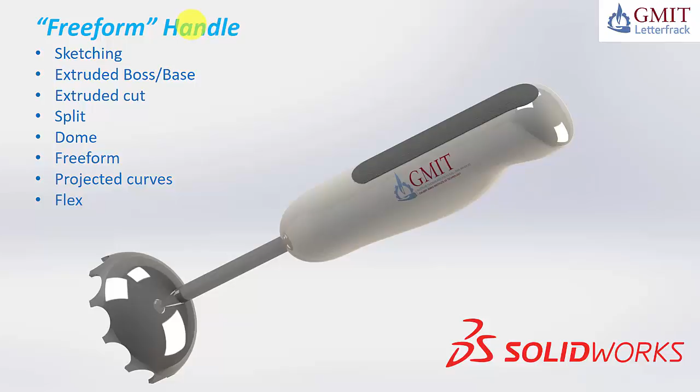In this tutorial I'm going to run you through the Freeform feature primarily. The blender handle itself isn't overly realistic, it's just a request I had from a teacher to generate the exact shape at the top of the blender handle. This is a pretty common type of handheld blender, and a lot of them can be drawn with a revolve feature, which is pretty simple, but some of them don't have rotational symmetry, so they can't be drawn that way. In this case we should use the Freeform feature to get this little molded indentation.

In this tutorial we will also be working through some basic stuff like sketching, extruded boss bases, and extruded cuts. We'll also split a solid, use a dome feature to get the curvature on the top, use a freeform feature to mold the main shape of the handle, and use a projected curve to put the black grip on the back. We'll also apply a flex feature just to show you what it does, but it hasn't actually been applied in this image. So let's begin.

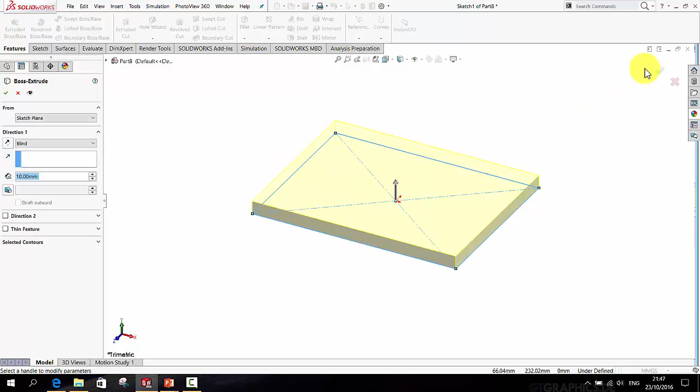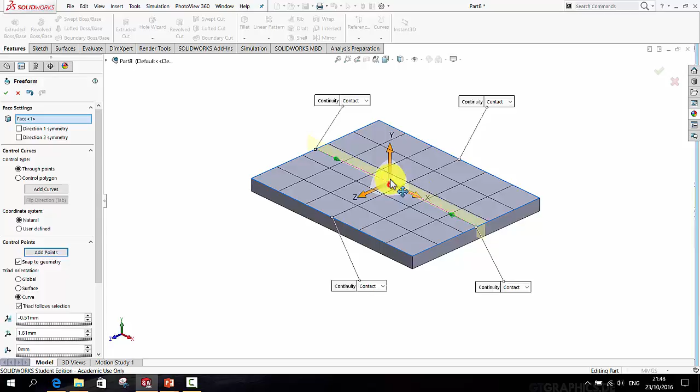Now moving over to SolidWorks, I'm going to begin with a quick demonstration to explain what the Freeform feature does. By creating a simple solid, I can go to Insert, Features, Freeform, select any face I wish, add a curve or curves to the surface, add points to that curve, and then simply drag those points up or down to deform or mold the surface into the shape I want.

So that's just a quick demonstration of what the feature does. I will delete that and begin again.

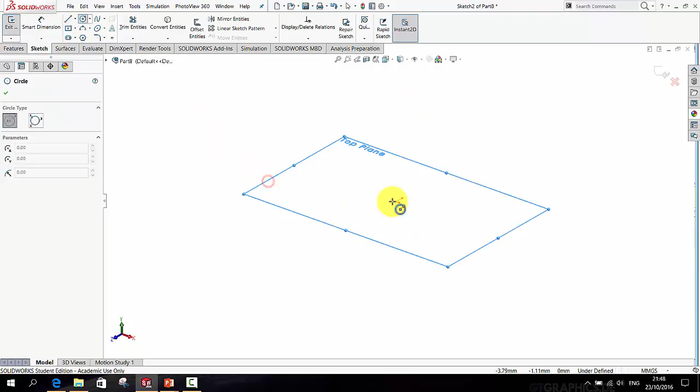This time I'm going to sketch a circle on the top plane and extrude that into a cylinder. I'm not going to give precise dimensions because it's more the concept I'm interested in this time rather than the actual artifact. So I'll generate a cylinder with approximately those proportions.

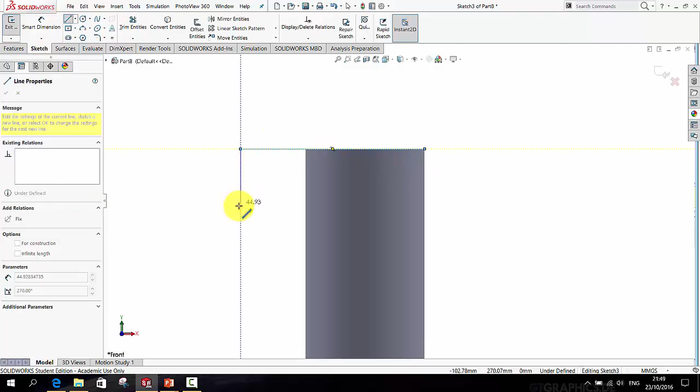Now on this plane I'm going to draw a sketch to cut a 25-degree taper from the top of the handle. Dimension those two lines to be 25 degrees and apply an extruded cut. Let's set that to be mid-plane, and now I have a nice bevel at the top of the handle.

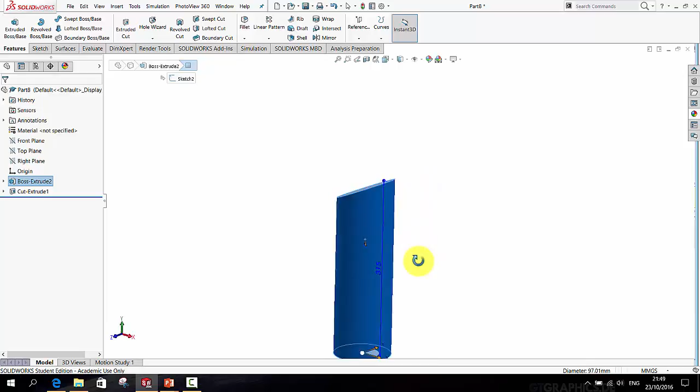It will not be possible for me to freeform or mold that blue surface in the same way as I did a moment ago, because that surface is infinite. It's got no edges, it just goes round and around. So to do that, I must use the right plane in this case as a tool to split that solid in two.

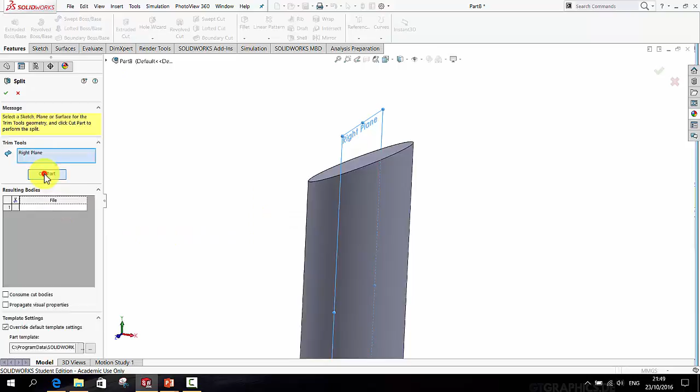So if I go to Insert, Features, Split, and select Cut Part, then confirm the two solids by clicking them and press the green tick, I now have this solid with that face, which certainly isn't infinite. It has a definite edge to the left and to the right.

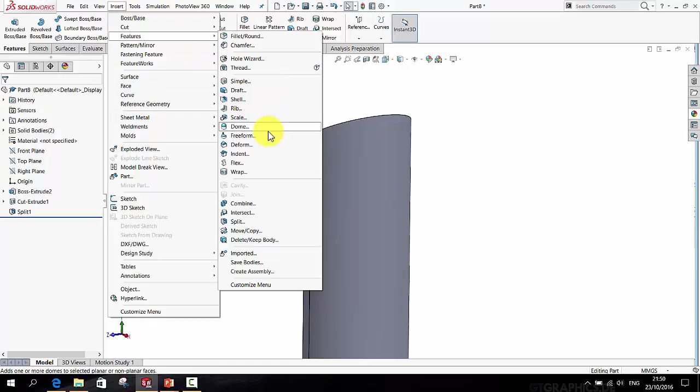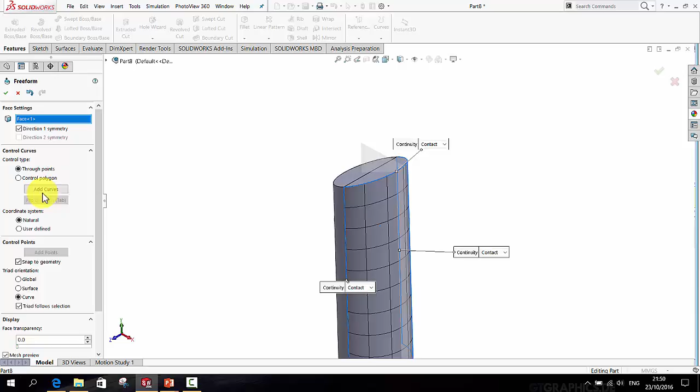So call up the Freeform feature, Insert, Features, Freeform, select the face I wish to deform, and I want to add curves, or one curve in this case, but I want to add it perfectly on the apex or extremity of that curved surface. To do so, I'll activate the Direction 1 Symmetry option, which will mean when I select Add Curves, as I move along it will snap to that point.

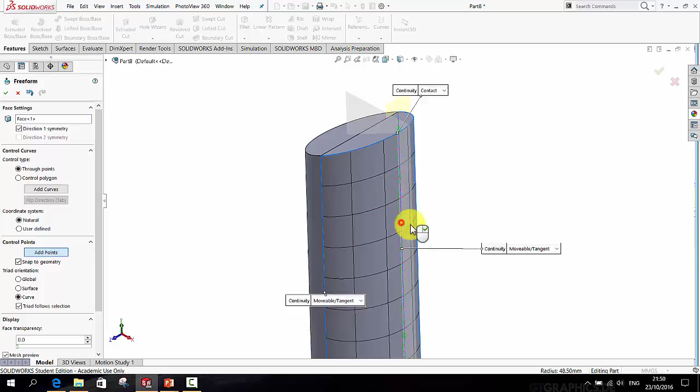So that line is going to be exactly where I want it. Click there. It will of course allow me to add more curves, but I'm happy with the one for now. So I will move over and select Add Points, and I'm just going to add a few points, maybe one there, and one there. When you're happy you've got enough points added, simply tap - sorry, I made a mistake there, so I'll undo that.

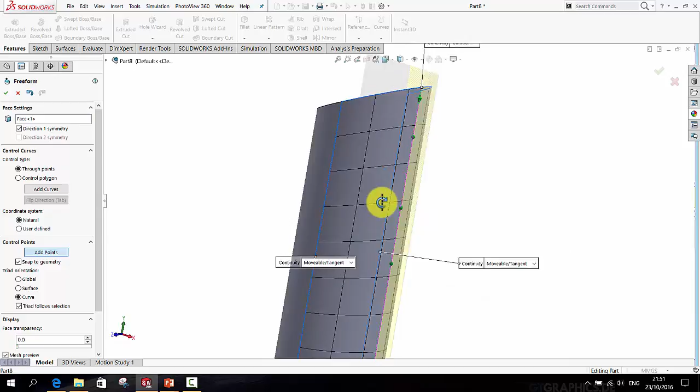Let's add the points more carefully to this curve. Add a point there, and one there. As I said, when you're happy the points are in the right location, tap Escape once, then simply drag the points.

Now it looks as if I'm dragging those randomly, but as I move those, look in the bottom left hand corner of the screen. The XYZ coordinates are given, so I can precisely move those in and out if I wish.

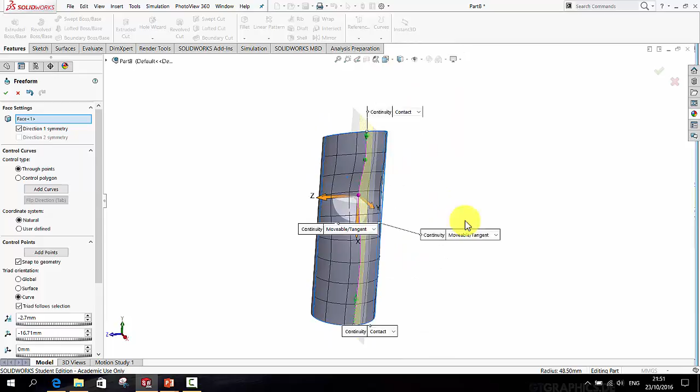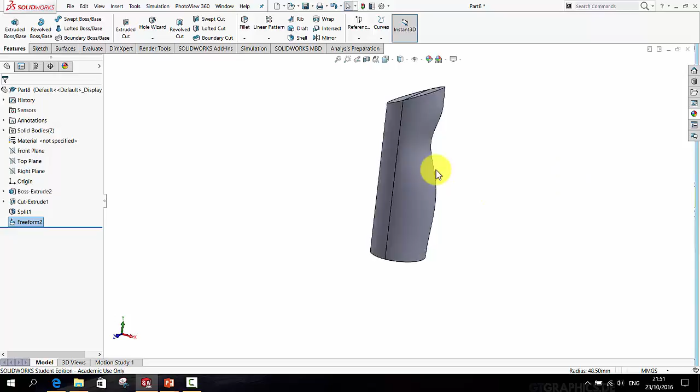These four handles that appear will also allow me to select how this curvature transitions into the adjoining face. So if I wanted, I could change this to tangent, and it would transition tangentially into its neighbour, which is what I want. I also want this one to transition tangentially - it's already picked up that, and I'm happy with that for now. If you wanted, you could have used a sketch picture to drag those points precisely in alignment with the sketch picture, but for now I'm happy with that.

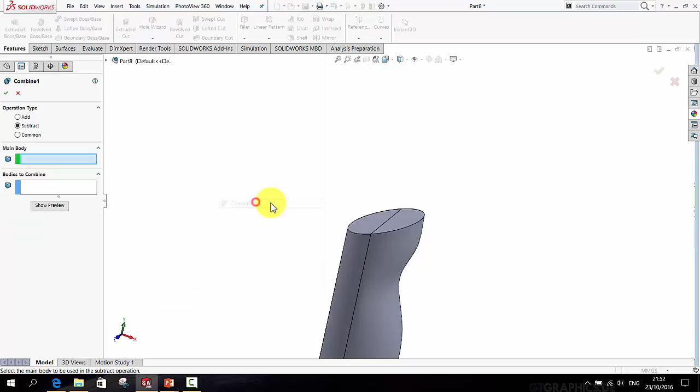I don't want a handle generated in 2 separate pieces, so I now have 2 separate bodies which I will join back together. Go to Insert, Features, Combine, and make sure the operation type is set to Add. Then simply select the 2 solids and press the green tick.

That's now 1 solid, so I will use the dome feature to pop out this top portion of the handle. Go to Insert, Features, Dome.

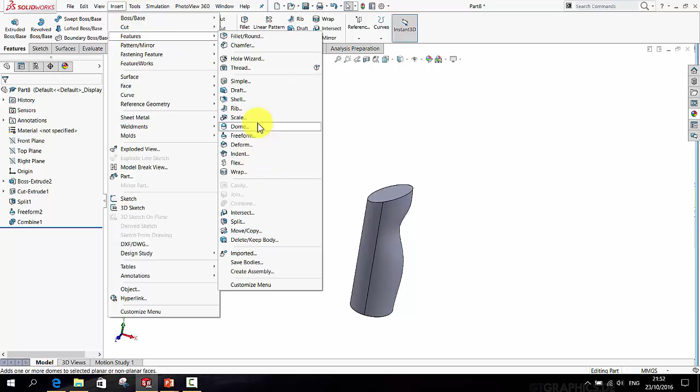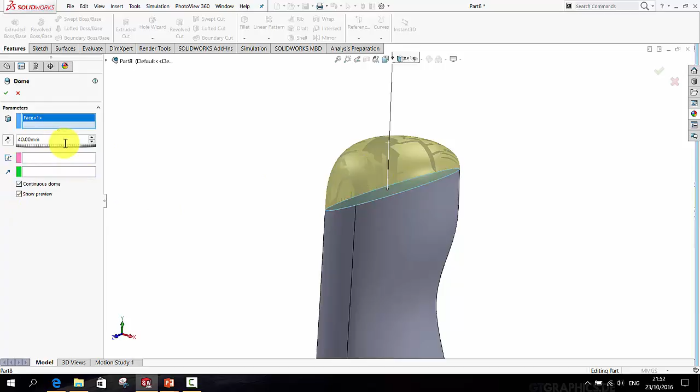Select the top face, and you may have to deselect Continuous Dome and add a bit of height, then select Continuous Dome again. Sometimes that happens - it doesn't give you the proper preview until you toggle that or make a change. In this case I needed to make the change, so 40 looks okay. Press the green tick and we're all set.

I've not used dimensions there, and if I turn off the hidden lines or shaded edges for a moment, it looks pretty good. It would look a lot better if I were working from dimensions, but that would slow me down a lot.

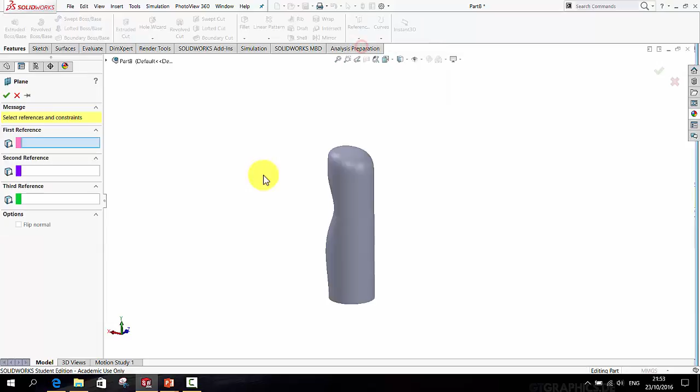So one other thing I will do is create a new plane, a reference geometry plane, make it parallel to the right plane in my case, and position it off the back somewhere, just so it's not touching the solid.

Start a sketch of a slot on that plane, look 90 degrees to it, and position the slot somewhere like that.

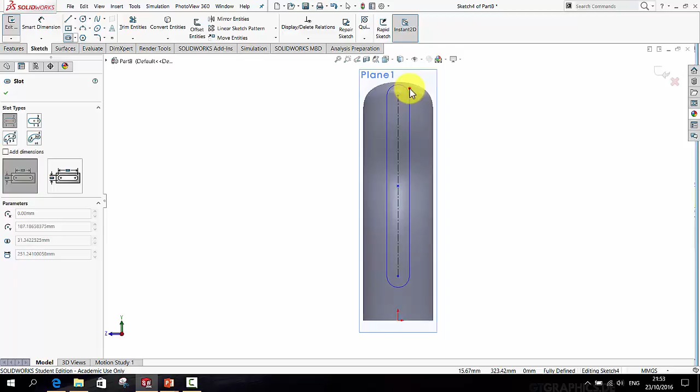As you can see, that sketch is away from the solid itself, but that's what I want. I'll now right click the plane and hide it, and I want to project that sketch onto the curvature. Let's see if we can do that.

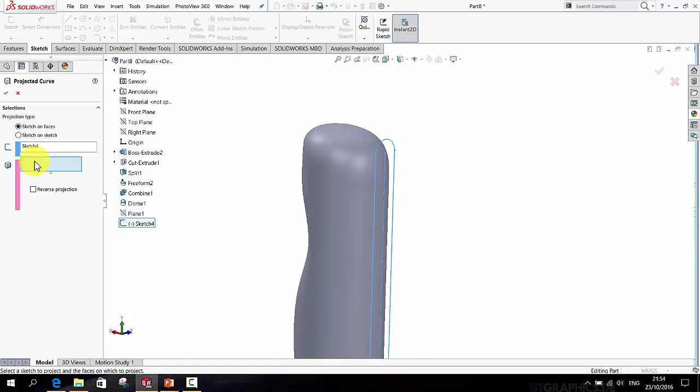Insert, Curve, Projected. It's looking for the sketch first of all - the sketch to project is sketch 4 in my case, and the projection faces are that face and that face. Press the green tick. I now have that sketch projected onto the handle.

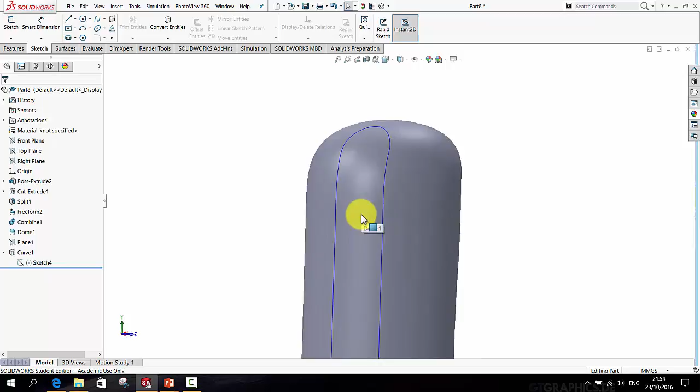I'm going to right click and hide that sketch for a moment - I don't need that anymore. I seem to have missed it, there we go. And if I want to thicken this or expand this out a little, here's what I can do.

If you do not have your Surfaces tab, right click any of the other tabs and make sure it's active. Click the Surfaces tab, then Knit Surface - those surfaces need to be knit together for now. Click the 2 of them and press the green tick to approve.

I now have a new folder called Surface Bodies. If I select the only surface body I have, I can see it's made of a few different faces, but I just want this little slot shape to be the surface.

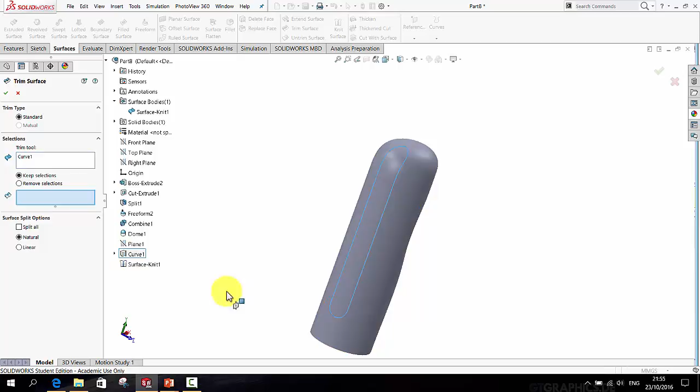Using the Trim Surface tool, select the trim tool as being this curve, then select Keep Selections, and simply select this portion of the surface and press the green tick. Now that surface trim only exists within the boundary I've just set.

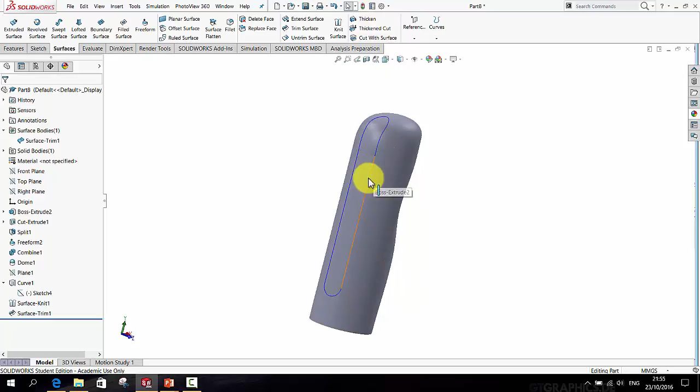What I can do then is either a thicken or a thickened cut feature to either indent that or emboss it out a little. I'll bring it out a little, so click Thicken. Set the value to be a millimeter, and not mid-plane, just out.

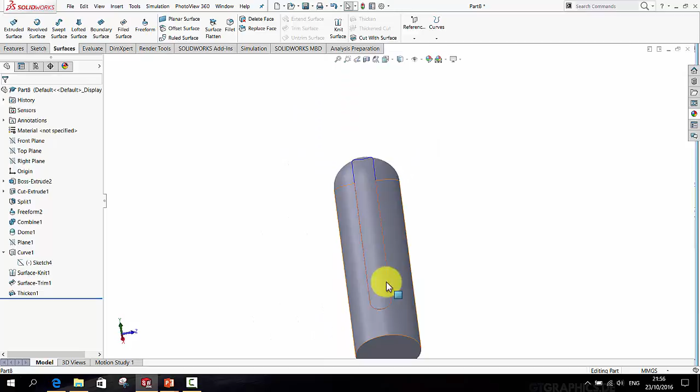If I approve that, that has been thickened. The line still stays there, so I need to right-click that curve and hide it. But if I turn back on the edges, you should see that solid has now made its way out.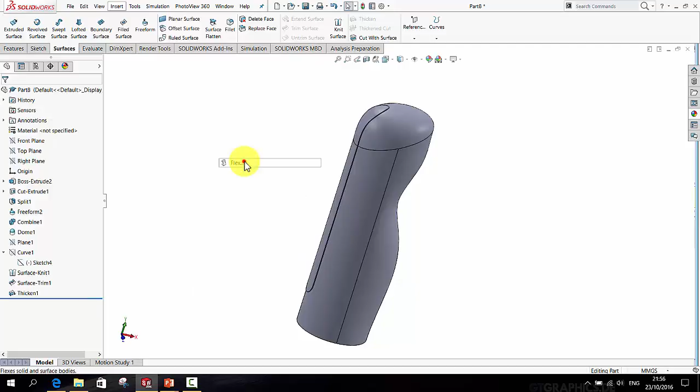The last thing I will do - sometimes these are a little more organic or curved, so what you can do is flex them a little. Go to Insert, Features and Flex. I can click the solid.

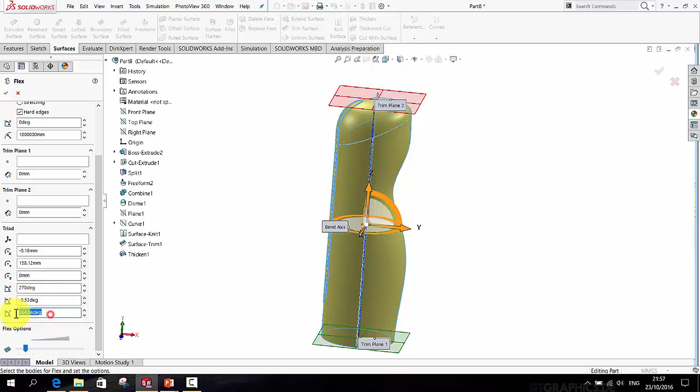It's very rare that this red axis appears in the right location, but you can rotate it. That red line is the line around which I want to bend, flex or twist this solid, so I'm going to rotate it, not by eye. I'll notice at the bottom, as I click this orange ring and rotate it, it gives me very precise feedback. In my case I want to rotate around the Z, and I'll set that to 270 degrees.

Then when I do that, I should be able to pick either the red or the green plane by its edge and just apply a small flex like that.

The main disadvantage with using the flex feature is that if you're flexing a solid such as this, which is quite complex in itself with the Freeform feature, it takes a long time to rebuild when you press the green tick. I've not taken the time to wait for it to apply here - I'm just working on this as a concept for a teacher, but the flex feature is a very good way of getting advanced curved organic looking shapes. Just give it the time to render and it will work for you.